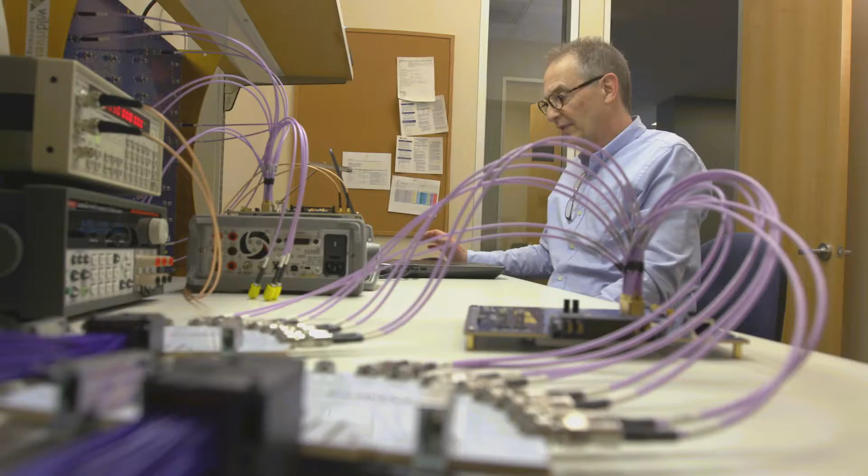We're doing something for the first time in almost every one of these chips, and that is part of the challenge and part of the excitement. What we are doing is physically impossible to do without simulation. Without these tools, it would be impossible to build these chips.

We're building chips for the folks who are building high-end routers. We're building chips for folks that are building hyperscale data centers. We're working on chips with customers today that are being deployed and are in trials in large cities around the world that are verifying the capability and the robustness of the 5G network that we believe will change the world.

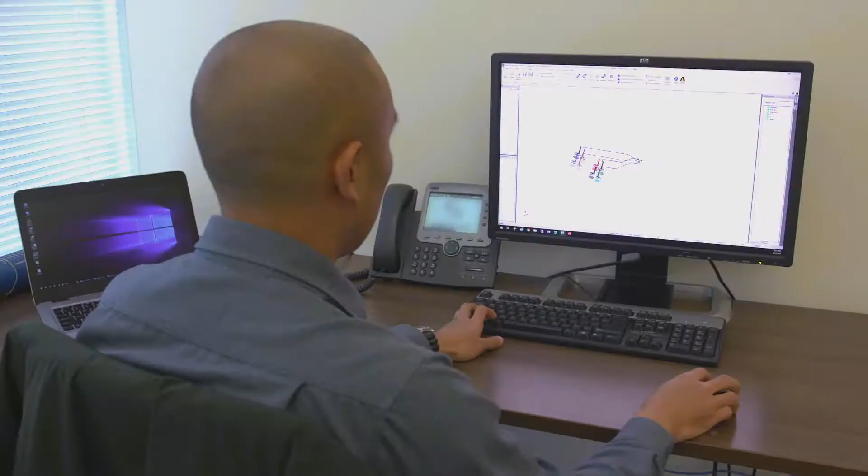Simulation is integral to this type of design process. If you were wrong, these issues would manifest as signal integrity, bit error issues, or power issues that also manifest as other functional issues that are very, very difficult to troubleshoot.

We found that ANSYS has a suite of tools that is focused on this problem. And that was really what drew us to the technology and drew us to the company, is that we felt we could get the right kind of analysis and accuracy to try and tackle this problem.

It's very difficult. Our customers are using the most advanced silicon technology. If the chip isn't doing something absolutely new and different, it doesn't really cut it in the marketplace. And it creates some very interesting challenges to build those kind of chips and deliver them.

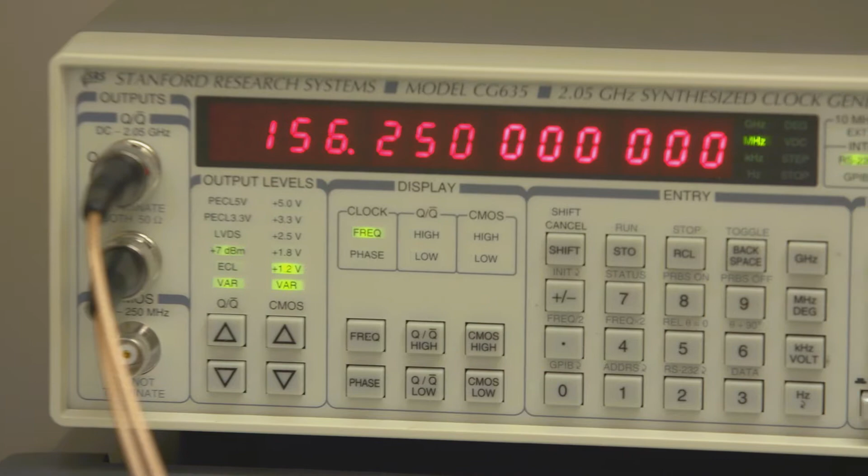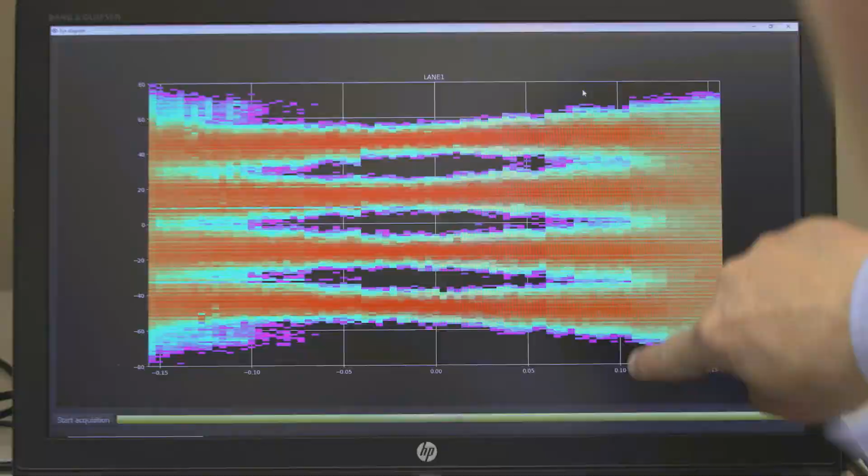RedHawk is the industry standard for power integrity extractions at the die level, and these tools allow you to run system level analysis. We want to make sure that the capacitors we place on the package substrate are actually effective in the bandwidths that they care about.

From a time domain perspective, we run transient simulations that verify that final noise coming out of that entire system.

When we book a deal with a high-end customer for one of these rather sophisticated ASIC designs, it can take a year or more to build that chip. This is why it's important to run the overall system level simulations.

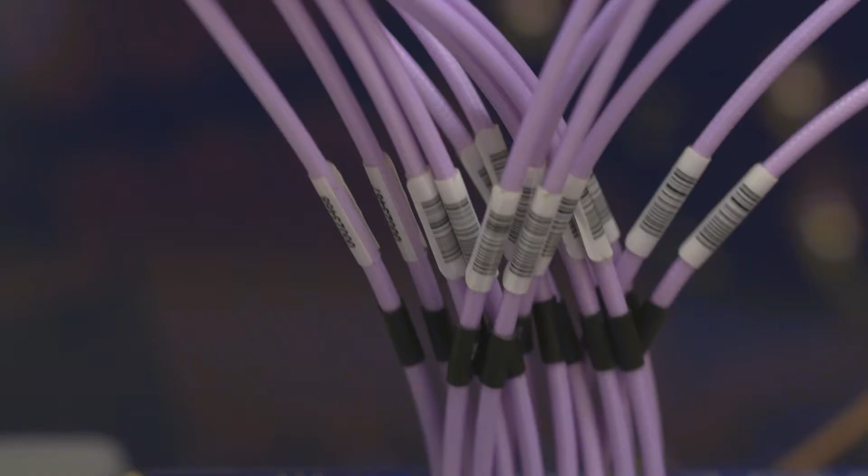We're trying to work in a very confined region where we don't have very much space. And you can use that space to maximize the signal integrity performance or maximize the power integrity performance, the power delivery. Everybody's invested multiple years and lots of money in this design. So these tools help to unlock these large ASIC deals, and that's the revenue driver for eSilicon.

It's not just highly accurate tools that are well integrated for chip package system design. Of course, that's important. But it's also the attitude that the development team at ANSYS really cares how we use the tools, and there's an open communication path so that we can make it better together.

A lot of these things you can't measure easily, so we make a lot of adjustments and optimizations that require the usage of simulation. Only when all of those problems are solved can you really deliver that chip into the end system with the performance that was expected. And that's success. That's when we win, that's when our supply chain partners win, and that's when our customer wins.